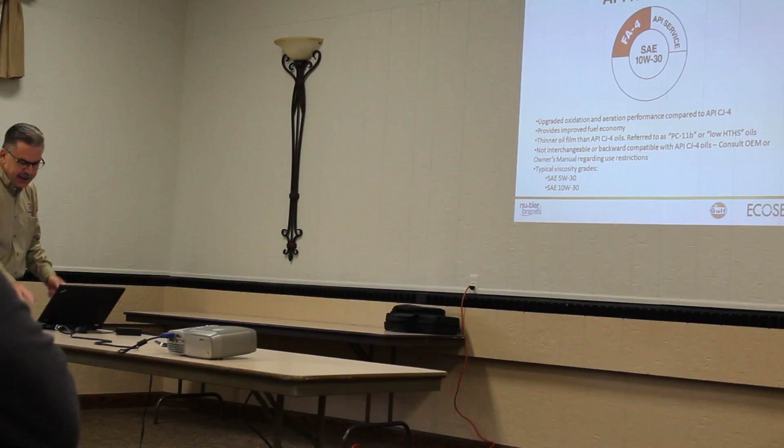So lighter viscosities mean more fuel economy. That's what we're gearing towards here. And again, FA4 is not backwards compatible.

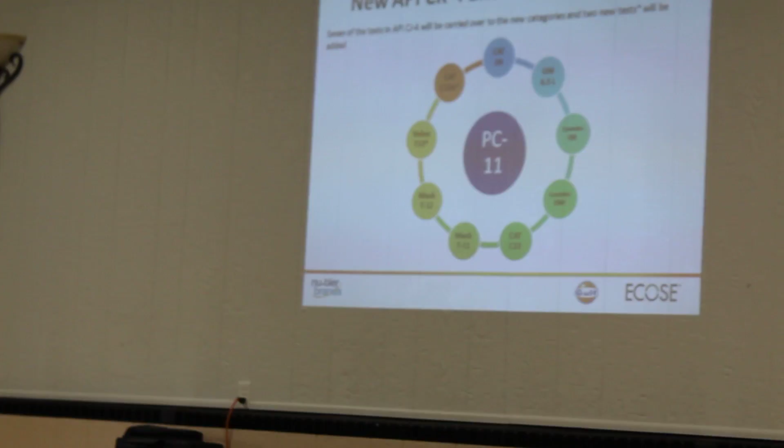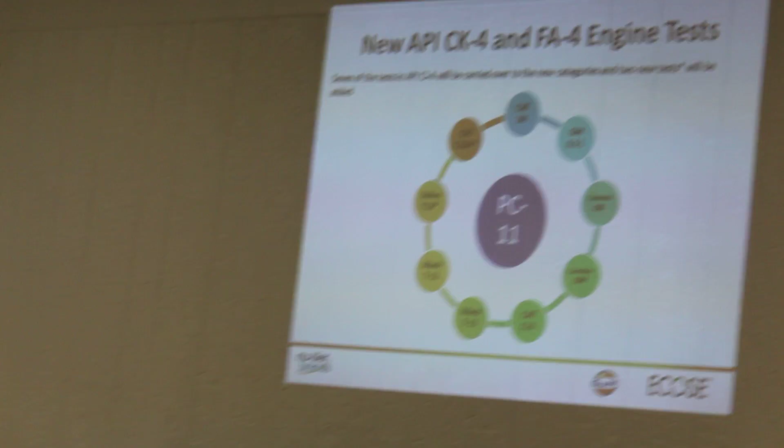So there's always a series of tests required to be able to license your products as CK4, FA4, or CJ4. It's not just about the money—all the oils have to pass a certain set of tests. These are the 9 tests that are required. If you notice, they all have an engine manufacturer's name associated with them, because each engine manufacturer has an area they like to see addressed as part of the API requirements. 7 of these tests are carryovers from the CJ4 engine oil category. The 2 new tests are the Volvo T13 and the CAT C13A. So both products, CK4 and FA4, have to pass these same 9 tests.

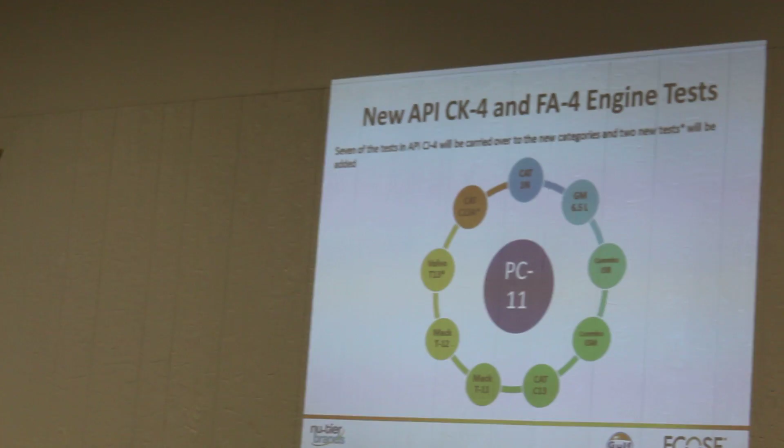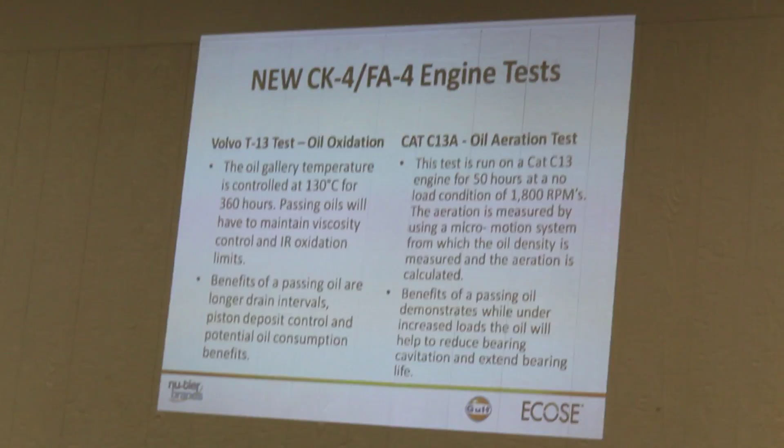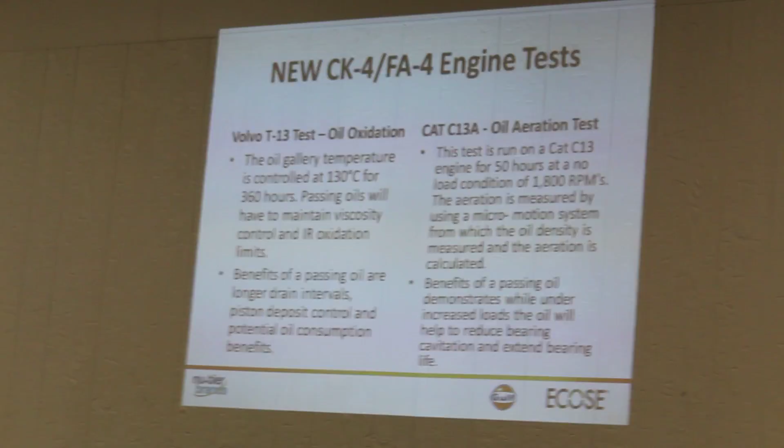This talks about the tests a little bit. I'm not going to get into real detail, but the Volvo T13 test is the oxidation test—it's a very severe test. And the C13A is the aeration test.

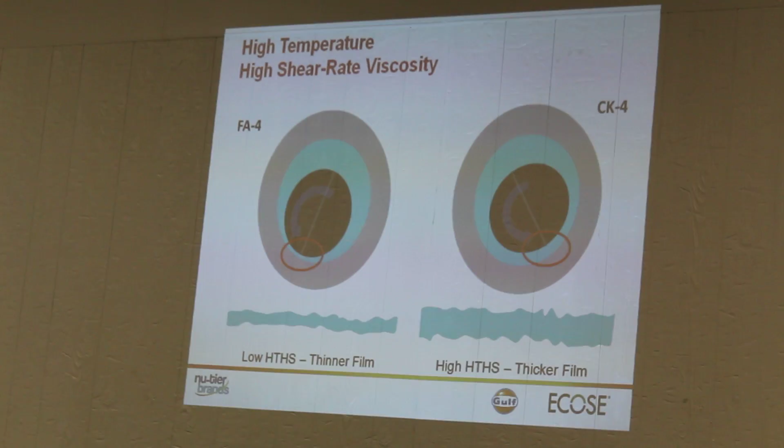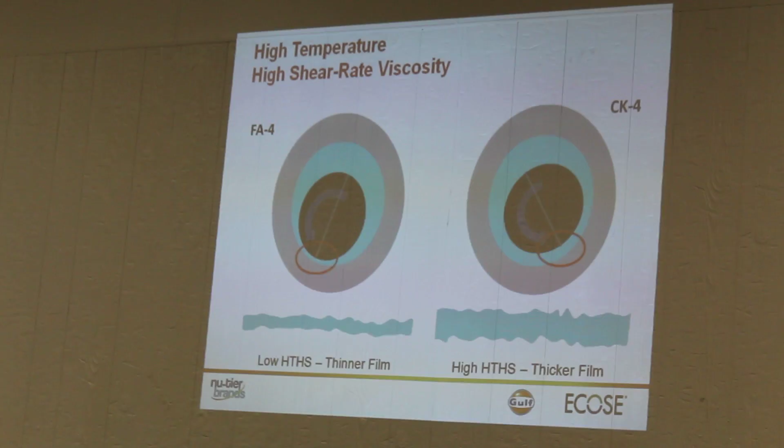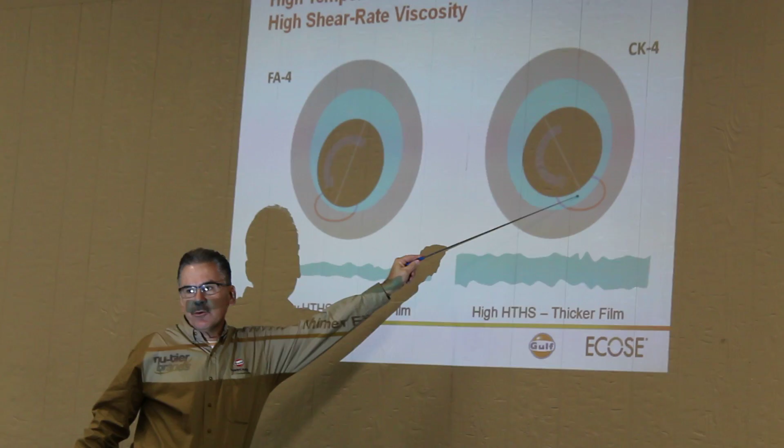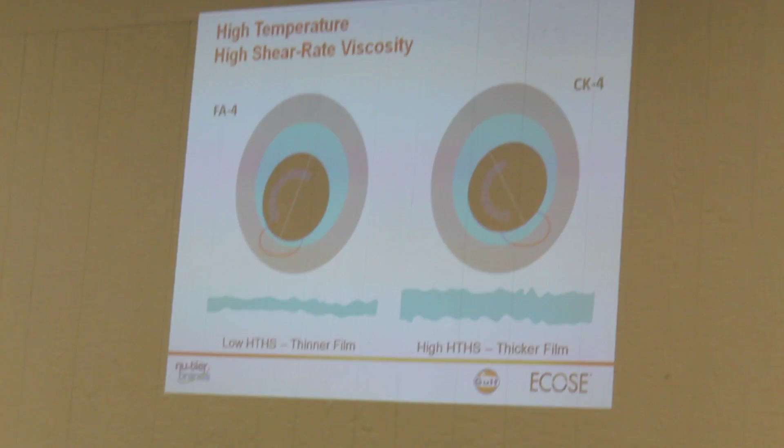So this is essentially illustrating what I mean by high temperature, high shear-rate viscosity. The flat one at the bottom doesn't show up very well, but think of this as your crankshaft and this as your connecting rod bearing, with your oil film in between the crank and the bearing. Here's what we're dealing with today: with CK4 oils, you're going to have a thicker oil film. With FA4 oils, that oil film is reduced. Now the thing that's confusing to a lot of people is that these oils could both be 10W30 oils, okay? So that gets confusing—how is one 10W30 thinner than the other?

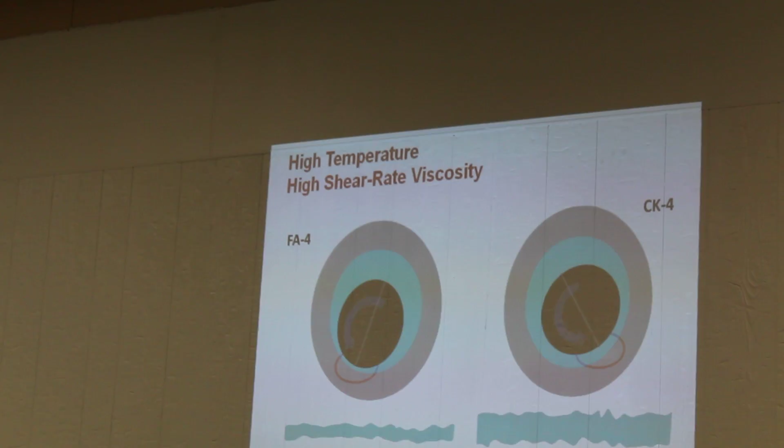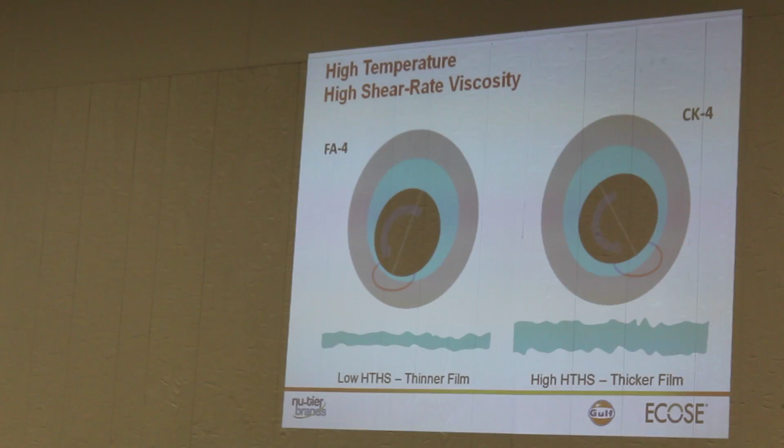Again, it's a measurement of the viscosity of the fluid in motion. So we're reducing that film in order to create less drag and improve fuel efficiency.

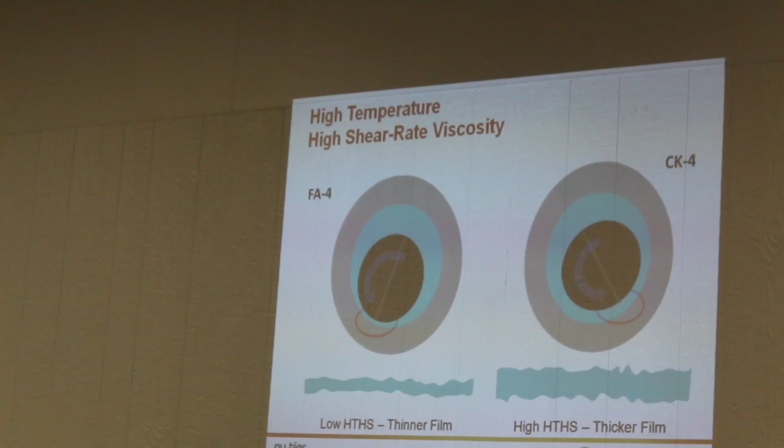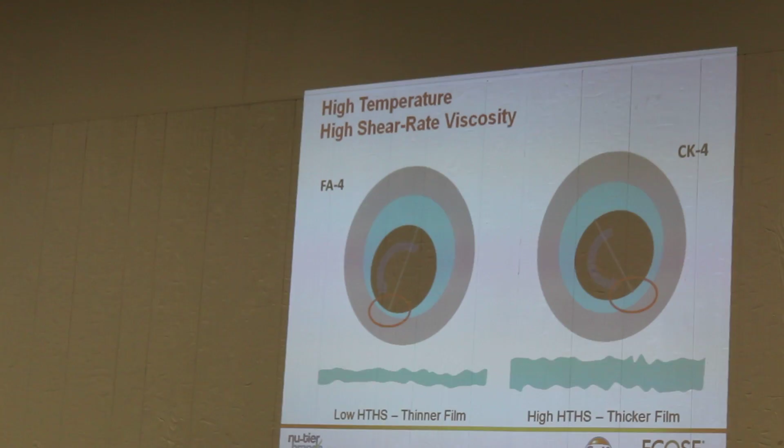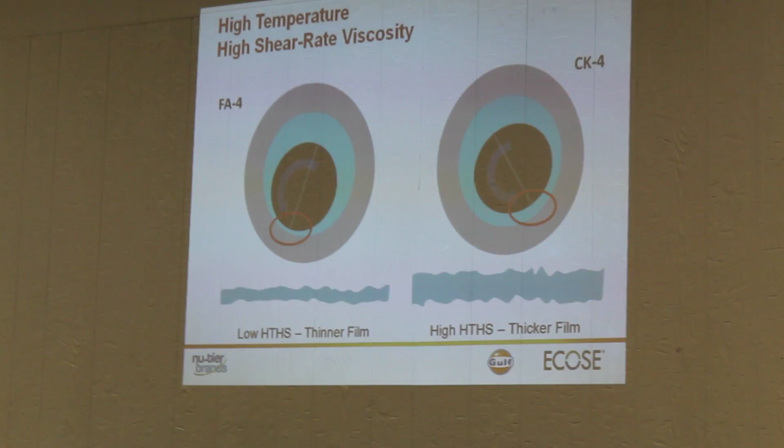So CK4 oils are very similar to the products we've had on the market as far as that high temperature, high shear viscosity. But the FA4 oils are only going to be usable in engines designed for it, okay? I'll talk about some other changes, but that's why they're not backwards compatible—the engine has to be designed to use these oils that create a thinner oil film.

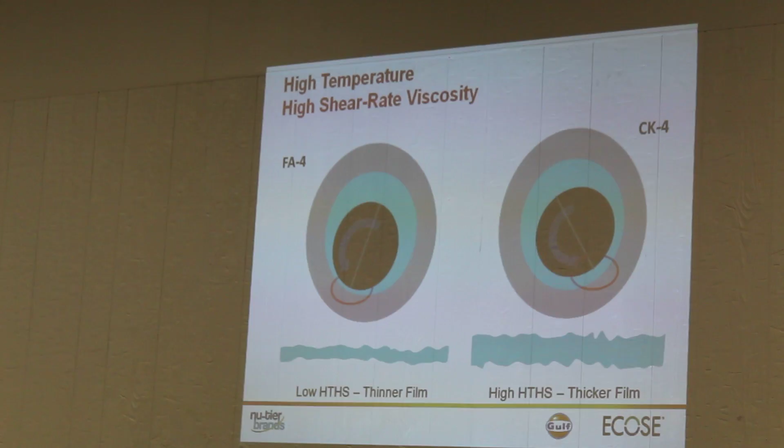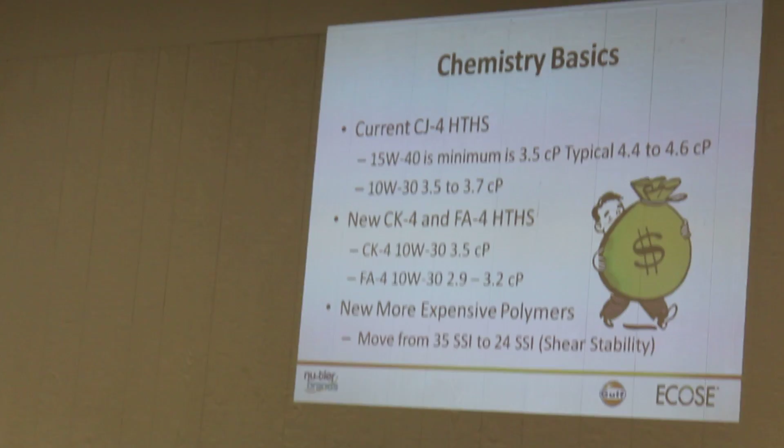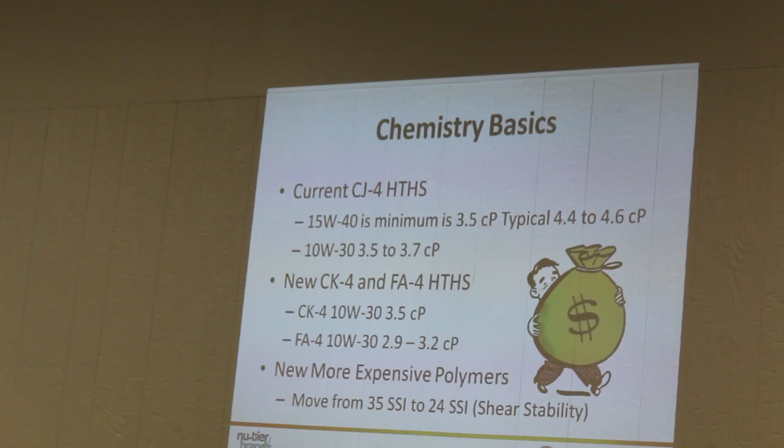This is just talking about the numbers and the limits. This may or may not mean a whole lot to you guys, but currently this is the HTHS viscosity requirement: 15W40 today is a minimum of 3.5. That's going to stay the same moving to the CK4 side, but on the FA4 side, that HTHS viscosity is lowered to 2.9 to 3.2—it has to be within that range.

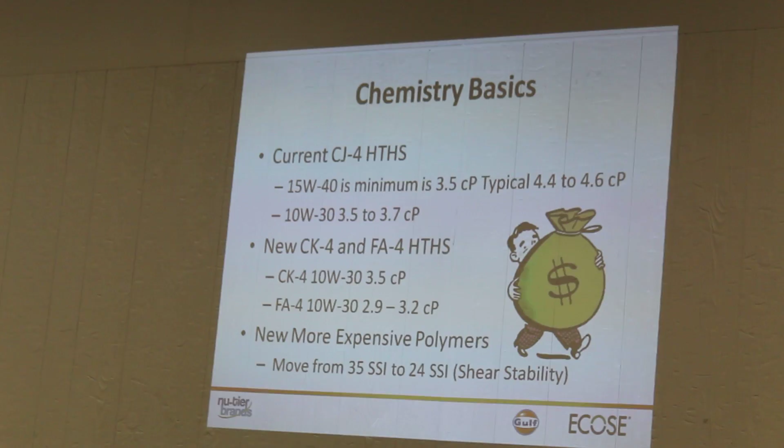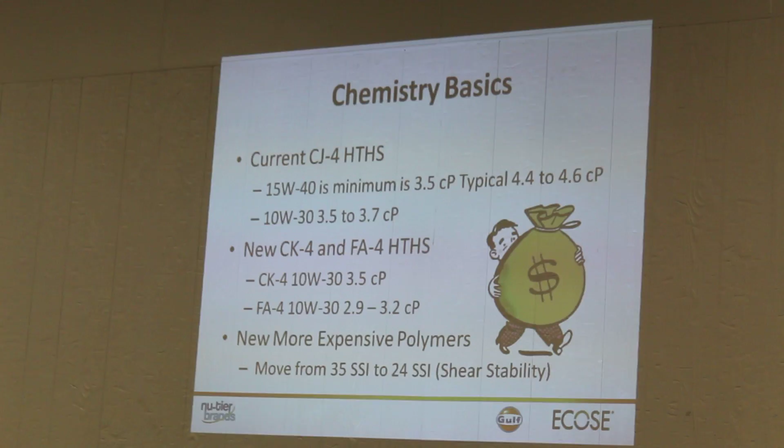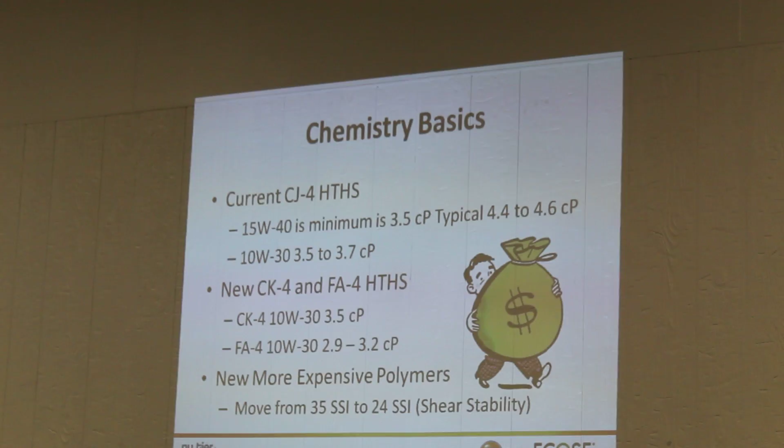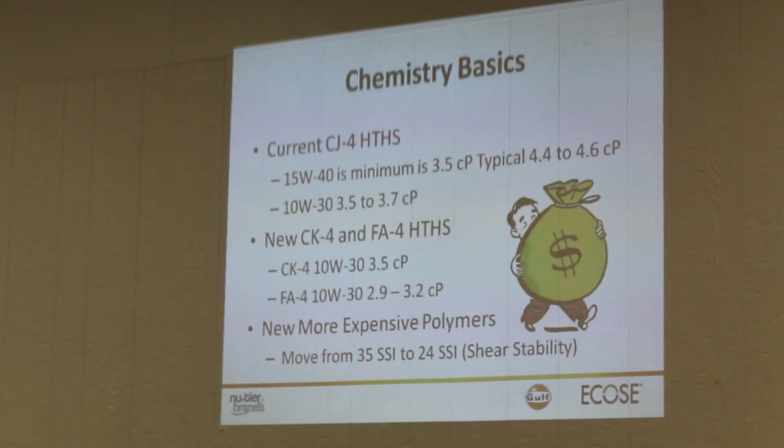How do we do that? How do you have two 10W30s with different HTHS viscosities? Mike has on here, more expensive polymers. A polymer is what actually makes a multi-grade oil a multi-grade. Polymers contract when the oil is cold—it makes it act like, if you're talking about a 15W40, when it's cold it acts like a 15 grade oil. When the oil warms up, that polymer expands, and so at 100 degrees C, that oil acts like a 40 grade. So with different polymers—I don't know exactly what the terminology is there—but that's how they're able to lower the HTHS viscosity and still have them both rated as 10W30.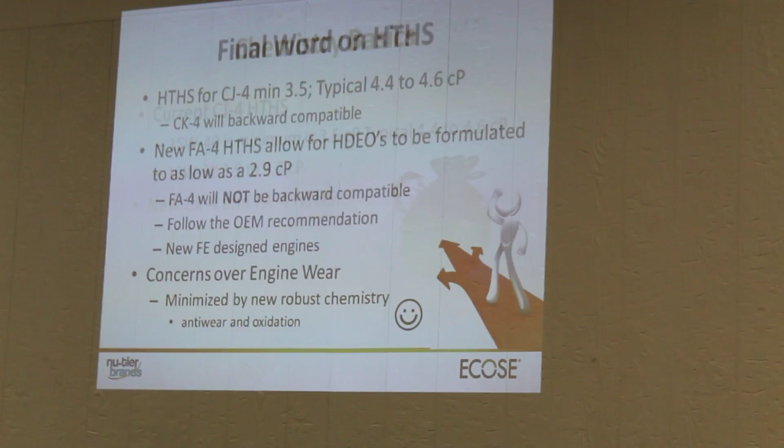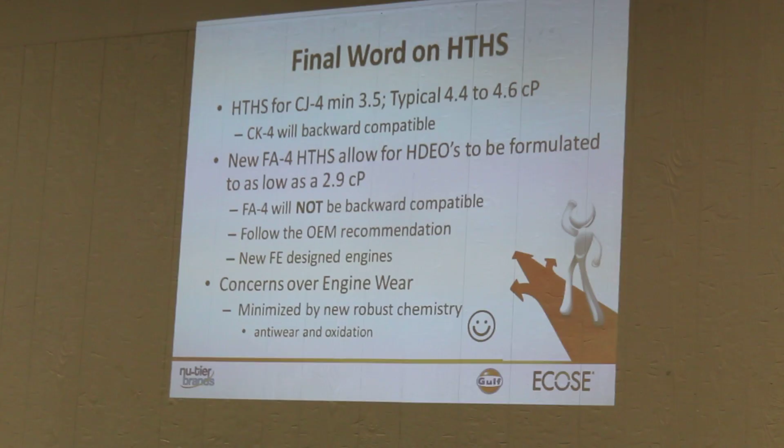And I can't say this enough, the new FA4 oils are not backwards compatible. Very important.

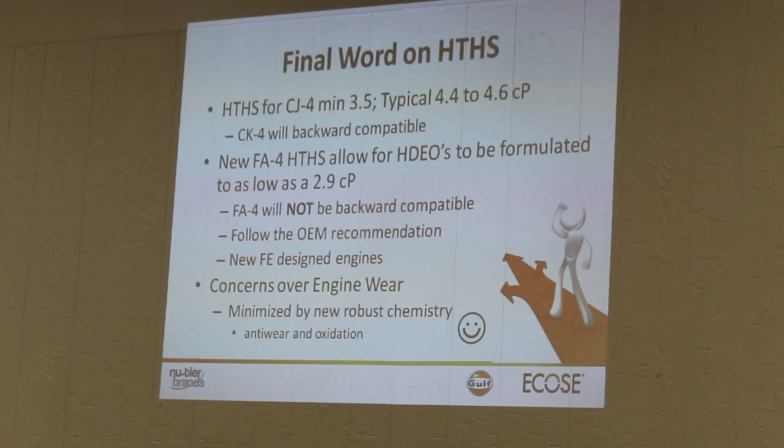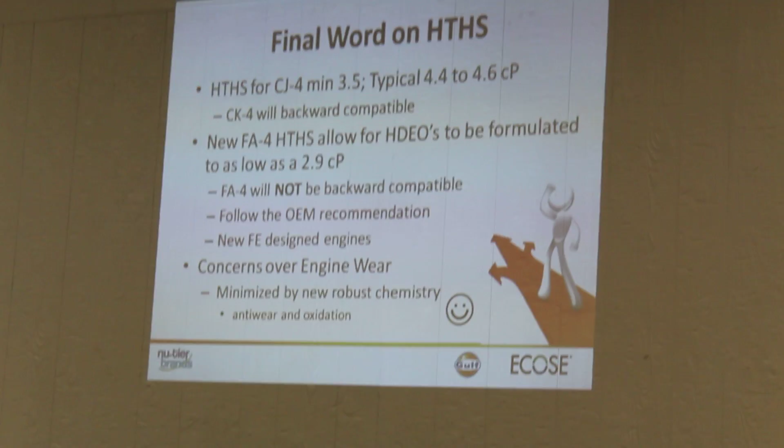I remember when the CJ4 oils were introduced, we had CI4 Plus oils on the market at that time. Guys would go out and buy 2007 trucks. Truck dealers never told them that they needed to upgrade to a CJ4 oil.

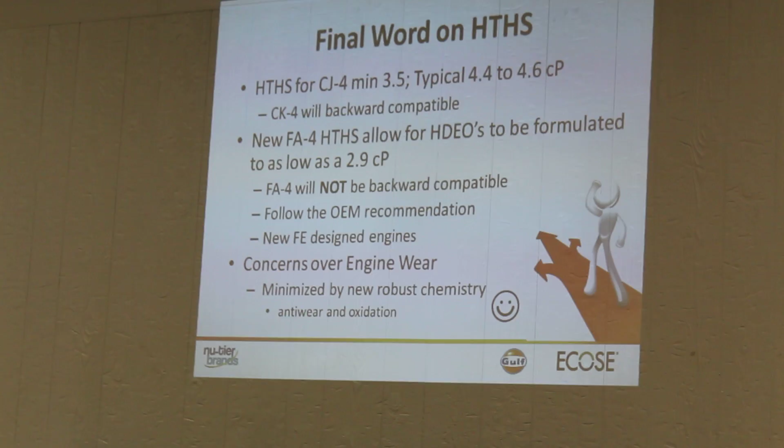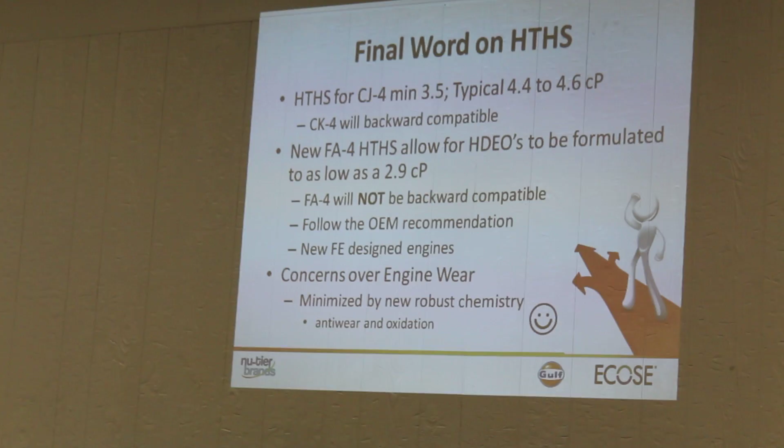So you had some guys that were still running CI4 Plus oils in trucks that should be running CJ4 oils. Hopefully this time around, truck dealers that you're buying from will let you know, but you need to make sure you ask based on the engine you're buying. Does it call for a CK4 type oil or does it call for an FA4 type oil?

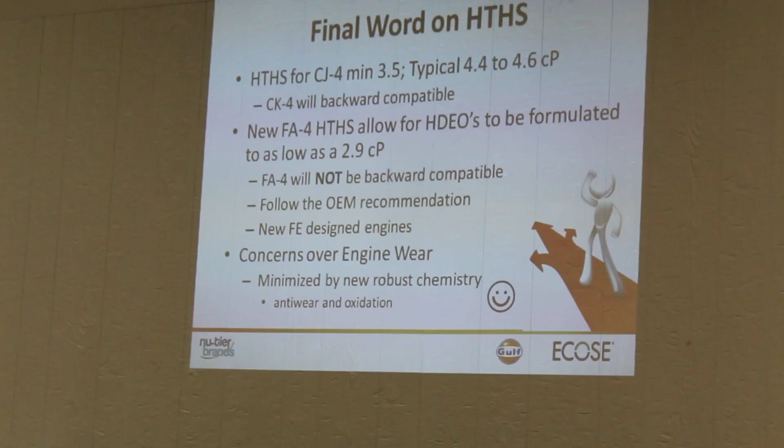Big difference. Hey Tom, what engine manufacturer is going to require the FA4 so far? I'm going to show you that in a little bit. So follow the OEM recommendation. I'm sure it'll be in the book if they don't tell you, but...

More on the cap, right? On the fill cap, you would think too, right? You would think so. Yeah, you would think.

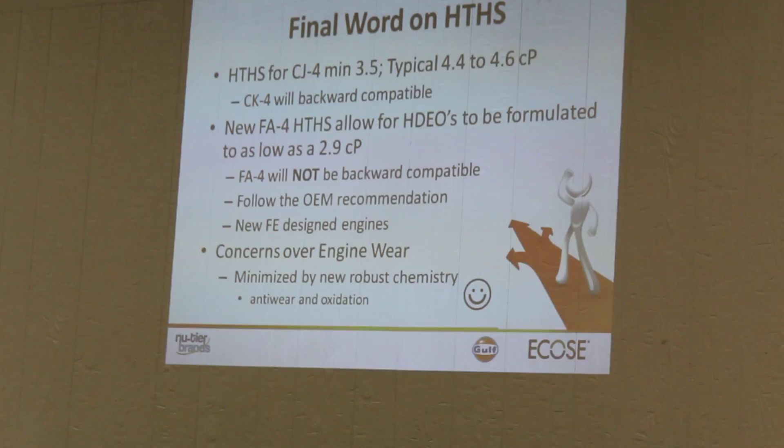So obviously, a lot of people, you talk about reducing that film thickness in the oil. The concern is wear.

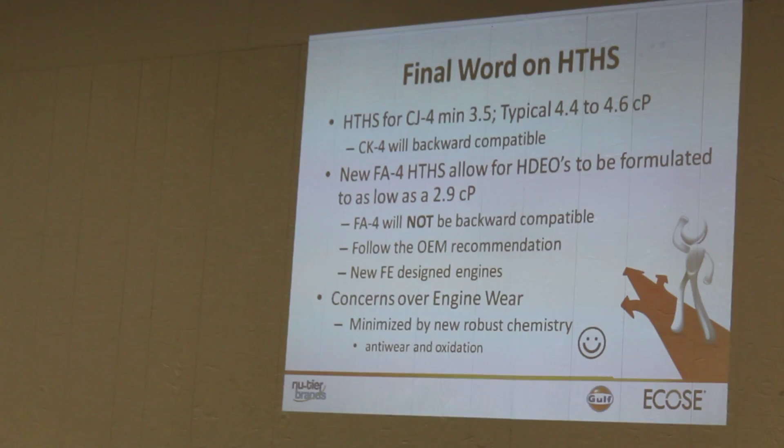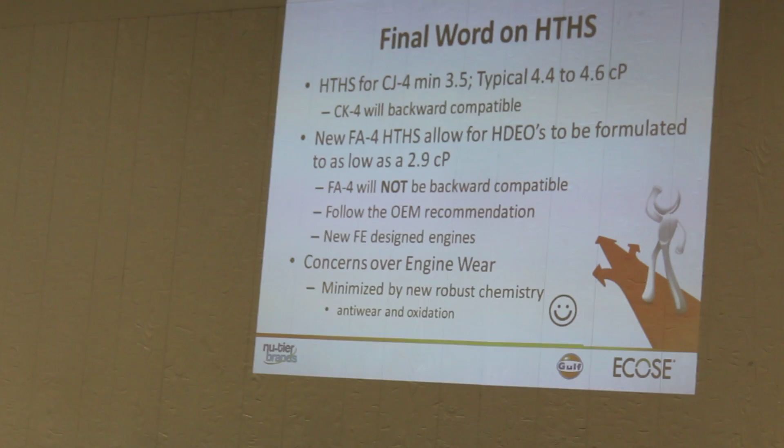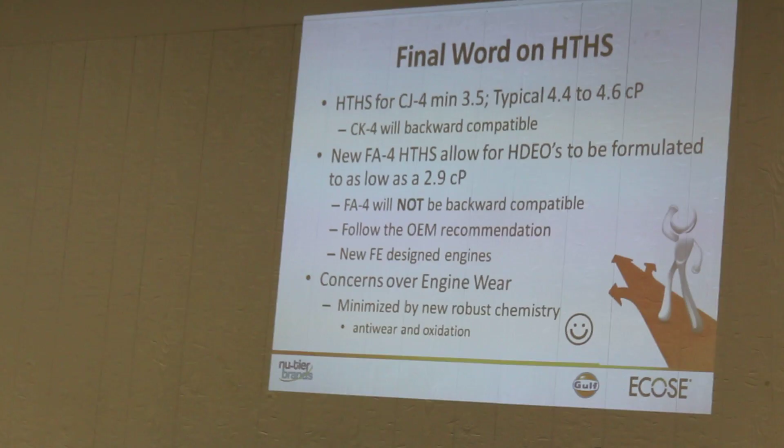There's been a lot of testing, and I've read some numbers. We're talking about millions of miles of testing on the new products between all the different companies. And with the chemistry involved in the engine design, everybody's very confident that both of these oils are going to work fine as long as you're using them in the right application.

Again, good anti-wear and oxidation resistance is going to help to keep that wear in check.

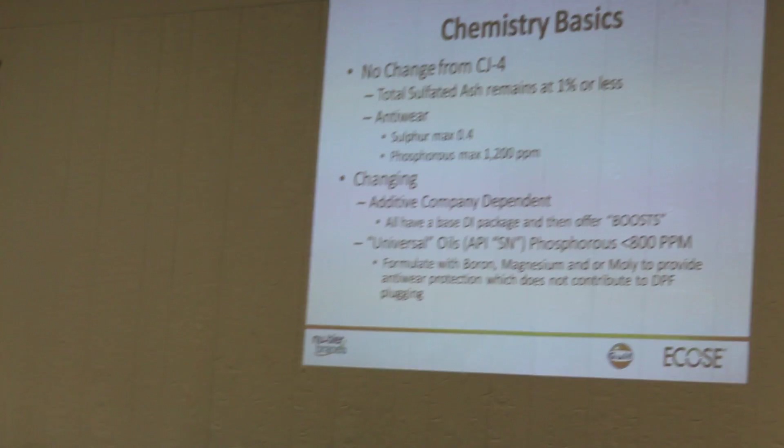So basically, when you're talking about the chemistry of the products, there's not really a whole lot of change. Ash remains at 1% or less. That's important because of your diesel particulate filters. Anti-wear, we're still using sulfur and phosphorus anti-wear additives.

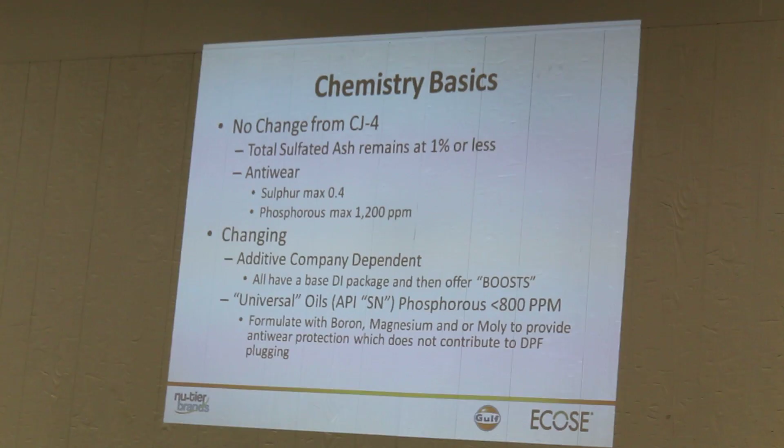I'll talk about kind of how our product line and a lot of other product lines are going to look down the road. But I do want to talk about universal oils.

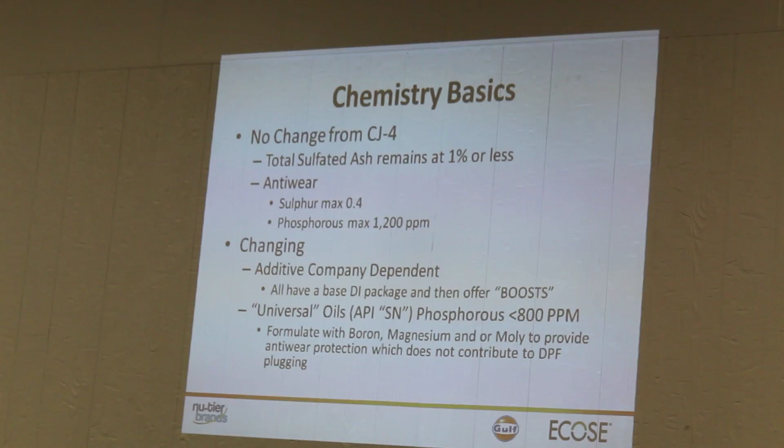You guys that are customers in here, is anybody using a 15W40 in a mixed fleet of gasoline and diesel engines? You guys do that at all? Okay, that's good. Once in a while it gets slipped in, but not on purpose. Well, it's like...

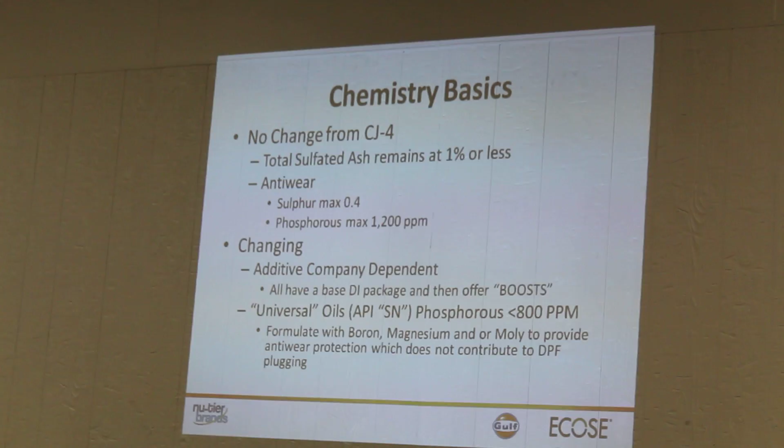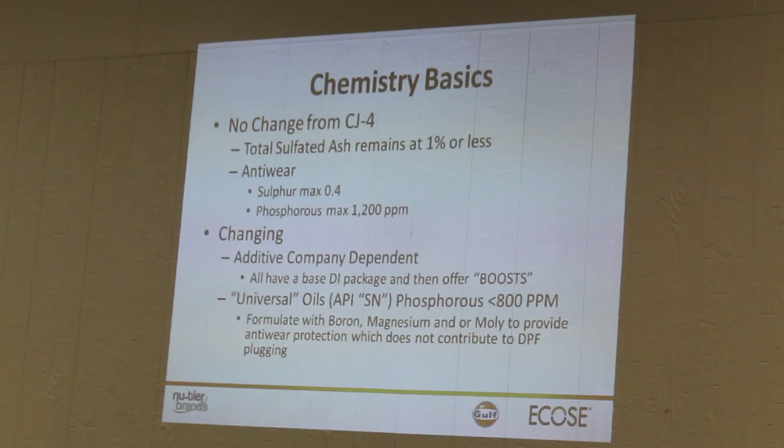The diesel engine specifications and the gasoline engine specifications are kind of going like this, going in opposite directions. I know everybody would love one engine oil, one transmission fluid, one grease, but those days are over.

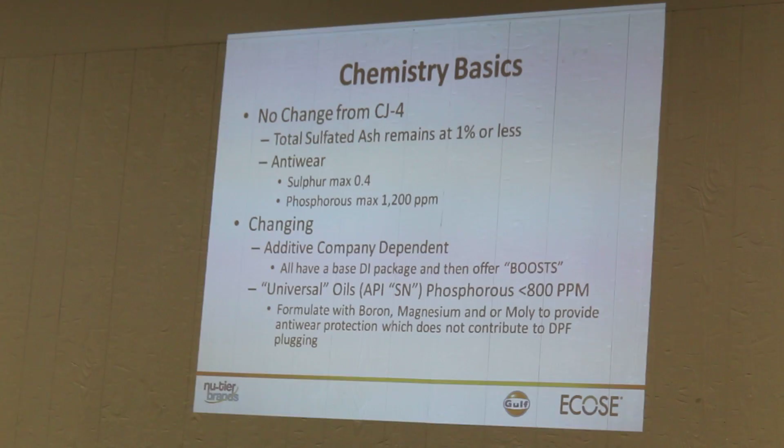It's just, I don't recommend it for a couple of different reasons. I'm not going to get into the whole phosphorus requirements, but that's one of the big differences besides the viscosity. So,

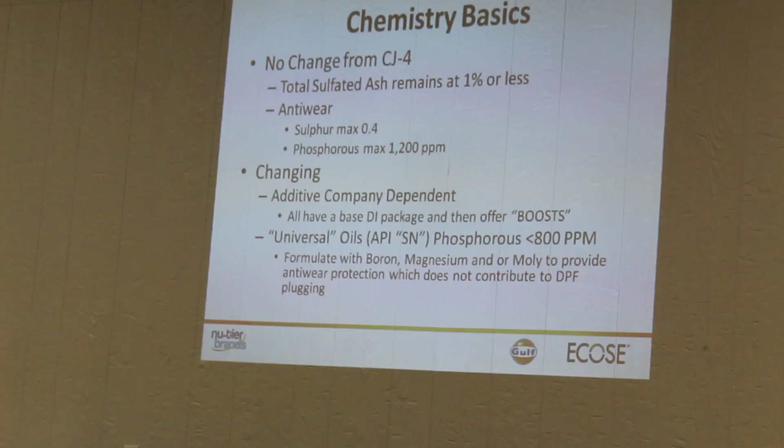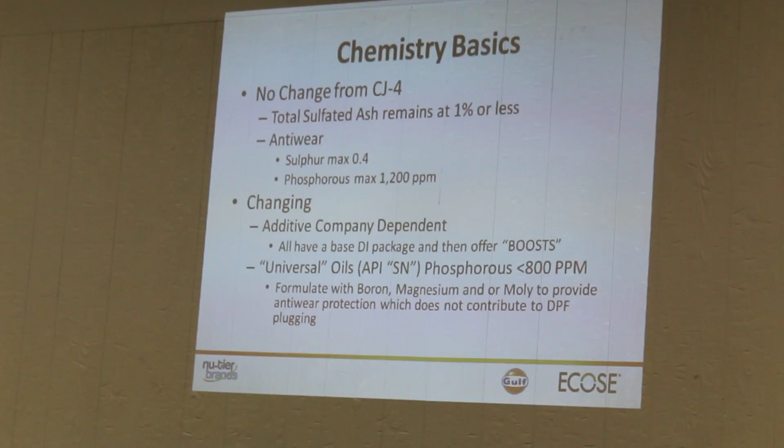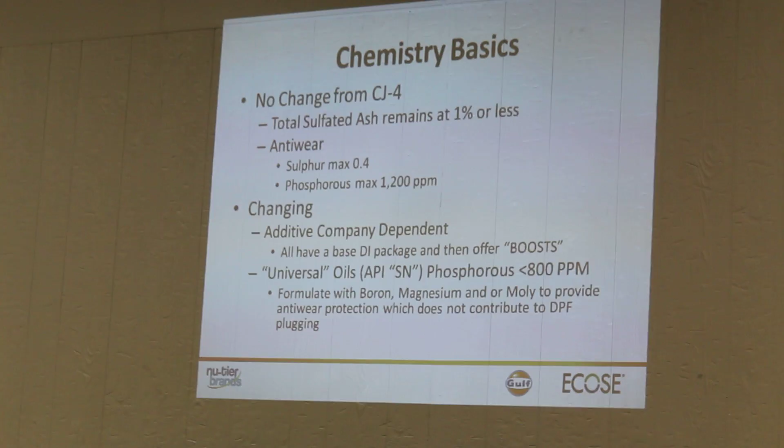But today, most companies, us included, we have a CJ4SN product available for customers that do want to use it. CJ4SN means it's CJ4 for the diesel side, SN for the gasoline side. Moving forward, that may change.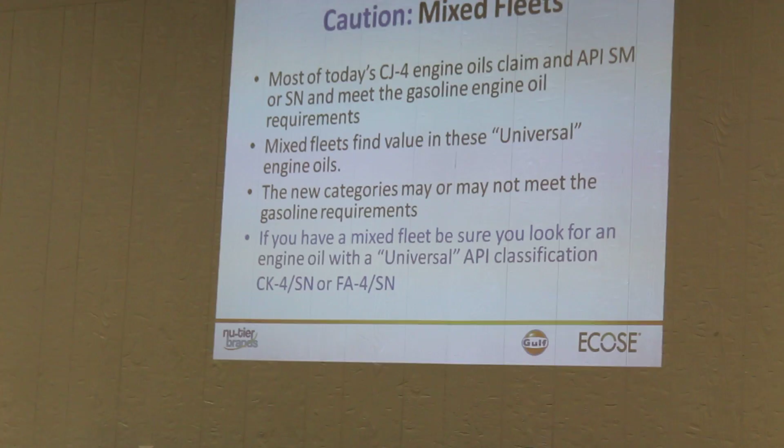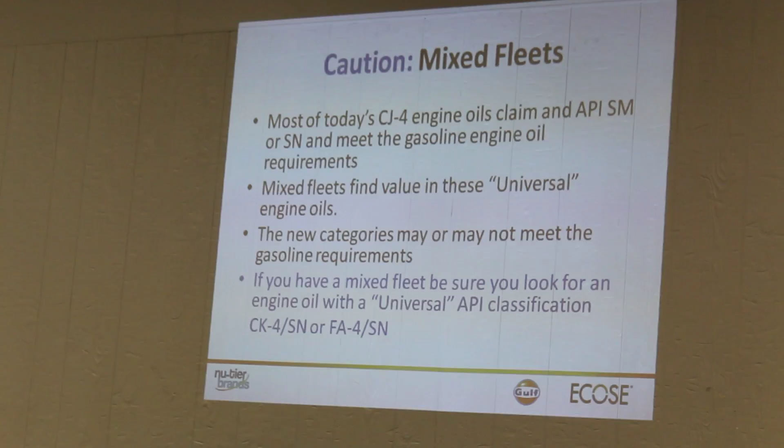Really what I want to point out here is that we're even taking a hard look at this right now. I don't want to overcomplicate it, but we may not... and if you guys that are sales reps have customers out there that are using a 15W40 or a CJ4 10W30 as a universal oil,

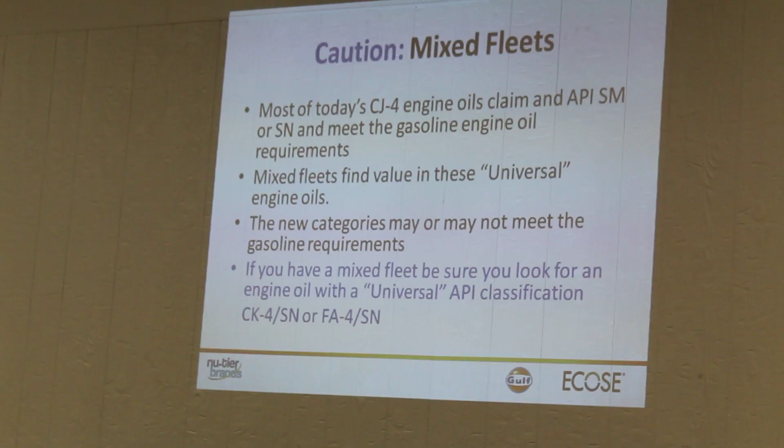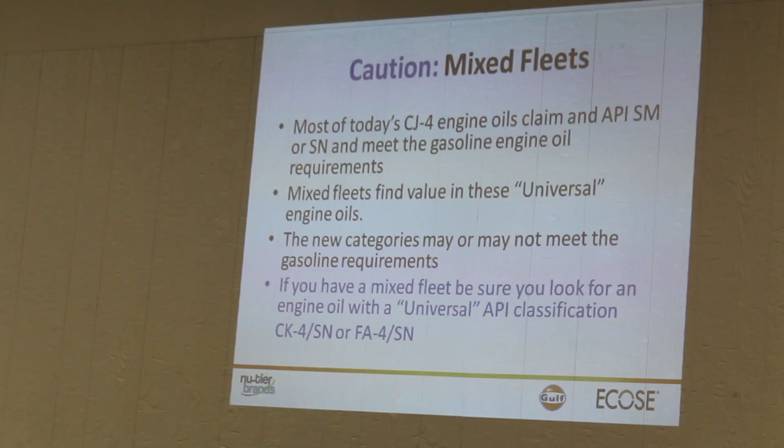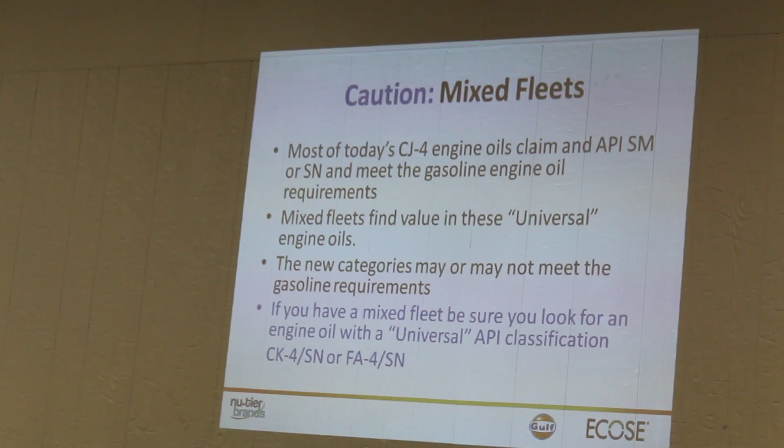not all companies are going to continue to make a universal product. There may be some companies that do, some companies don't. So customers need to be aware, just because they used a 15W40 as a universal product in the past, or a CJ4 10W30, they might not be able to do that moving forward because their company might not make that product. It might be CK4 only and not carry the SN designation.

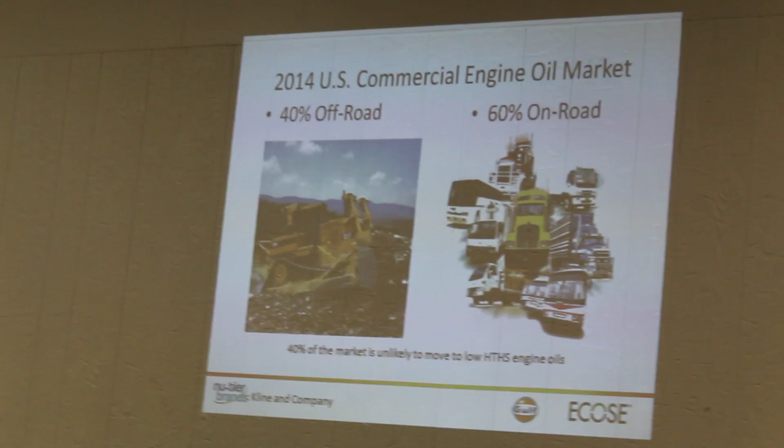Okay. This slide was 2014. 40% of the commercial engine oil market is off-road. The new type FA4 low...